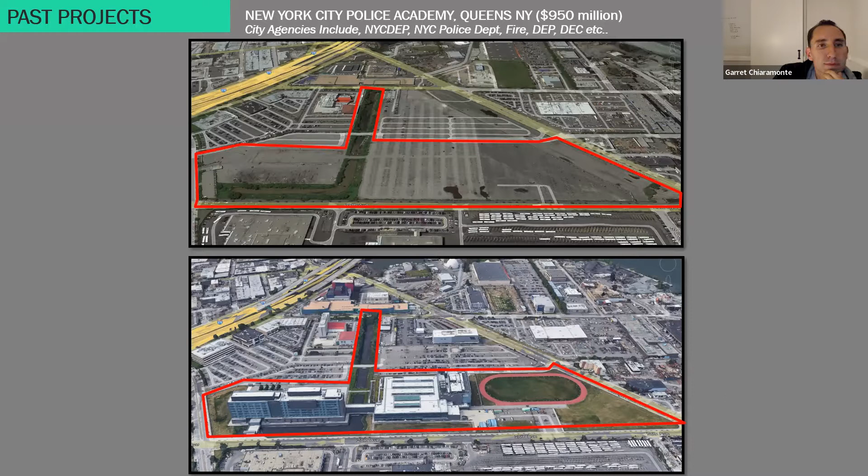All right, great. So I'm going to go through just a couple of very high-level projects because it puts the entitlement process in context related to very large, complicated projects versus some of the local projects.

This project here is the New York City Police Academy in College Point, Queens. People from this area probably know this location. So how do you take a parking lot, basically 35 acres, and build a world-renowned headquarters for the New York City Police Department?

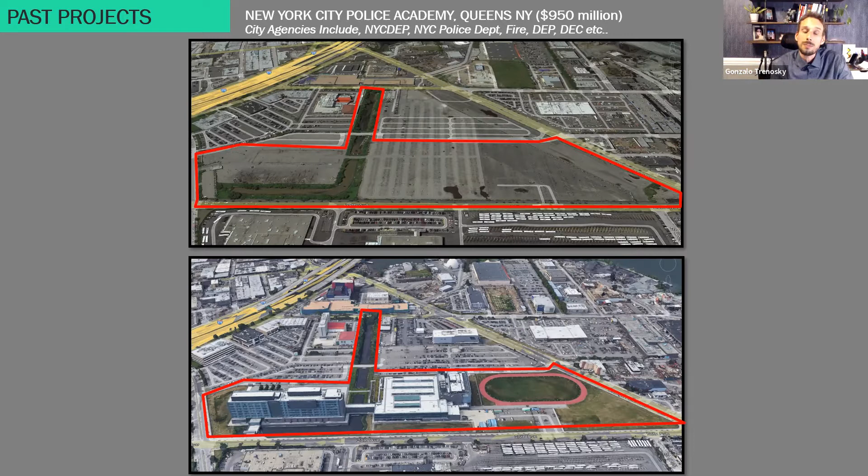Well, it's pretty large, a $950 million project, probably more than $1 billion at the end of the day. Basically 720,000 square feet of police academy training facility for the entire five boroughs area was designated for this site. Duration: 9 years from design all the way to final construction. So very long time frame.

And this is what I'm talking about when you're doing these types of public projects. They take much, much longer to take a piece of, basically what you'd think is an empty parking lot, and build what you have there. Really it's because of the reasons I list there.

Many stakeholders are involved. Public comment periods are very lengthy. You have to put in environmental impact statements through the DEP on the federal side, which takes upward of 18 months to 2 years to get through. You have federal and city dollars that go into these types of projects, further increasing the red tape.

You have very large design teams. My role was a very small role as the civil designer for this. You had architects, MEPs, just a huge team of engineers that were needed to really design this type of project, entitle it, and get it to final construction.

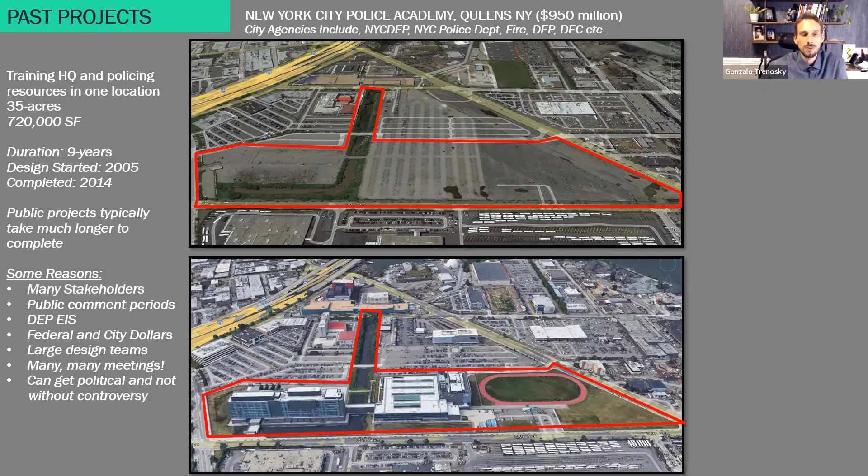Many, many meetings, as you can imagine. And really, these types of projects are very political and not without controversy. The Army Corps of Engineers also had a role in this project.

Now, I gave you kind of a definition of navigable water. So anytime you have a site which has some sort of creek, stream, or river, you want to make sure you figure out if it's an Army Corps of Engineers labeled navigable water, and that's kind of the definition.

Anything that is subject to the ebb and flow of tide, or has been used in the past as a transport route for interstate or foreign commerce, could fall under the navigable water designation. That's a very lengthy process through the federal side, the Army Corps of Engineers, if you want to touch any of that. In our situation, we had a little stream going through the site, which was an ACOE designated waterway, and that increased the duration of the design and entitlement process for this type of project.

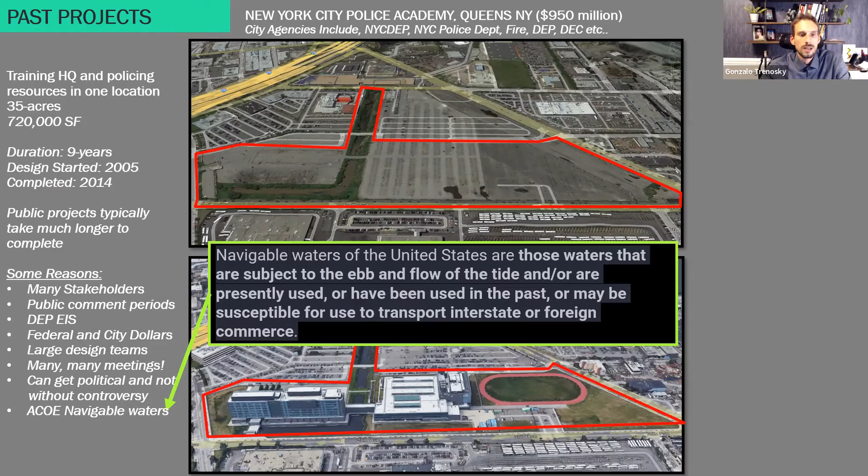This next one just shows what the final product looks like. It's a pretty amazing facility. That's a rendering above, and that's what was there before. It won a lot of awards and was designed by world-class architect companies. They have mock subway train stations inside the facility, mock parks, and buildings—anything needed to put police through certain trainings is located in these buildings. It was a pretty amazing project when it was finished.

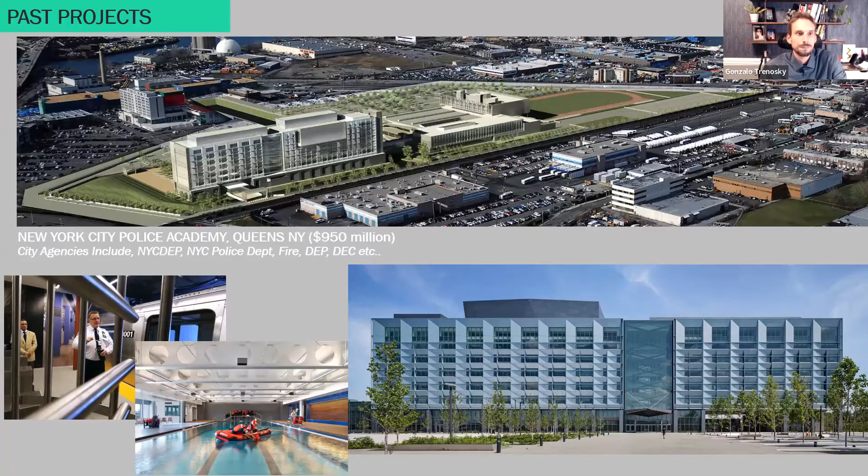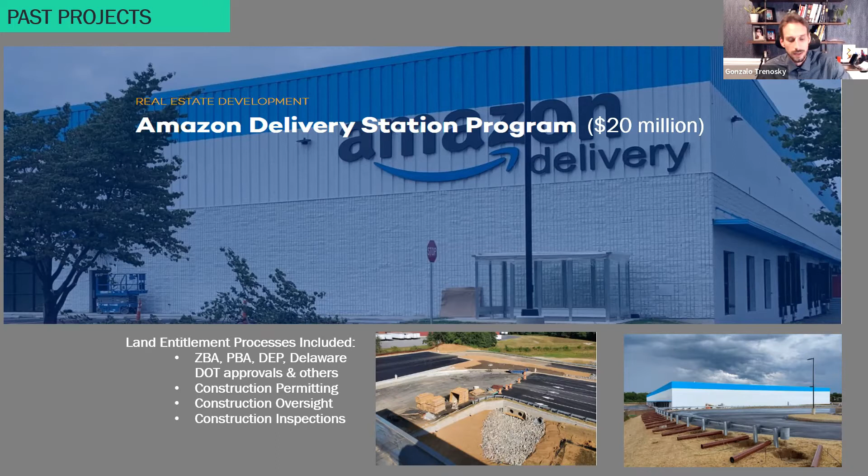The next one is more typical: Amazon delivery stations, the last-mile delivery stations you see pop up everywhere. These are pretty straightforward. We did a few of these, and it goes through the local process of zoning board of adjustments, planning boards, and DEP. This was a Delaware project, so it involved the Delaware DOT. We brought it through construction permitting, oversight, and final construction inspection. These were more of the bread and butter projects because it was a straightforward process. Most of the time these projects aren't very contentious because they bring jobs to areas that need it, so the municipality is usually very open to approving them—though not every time.

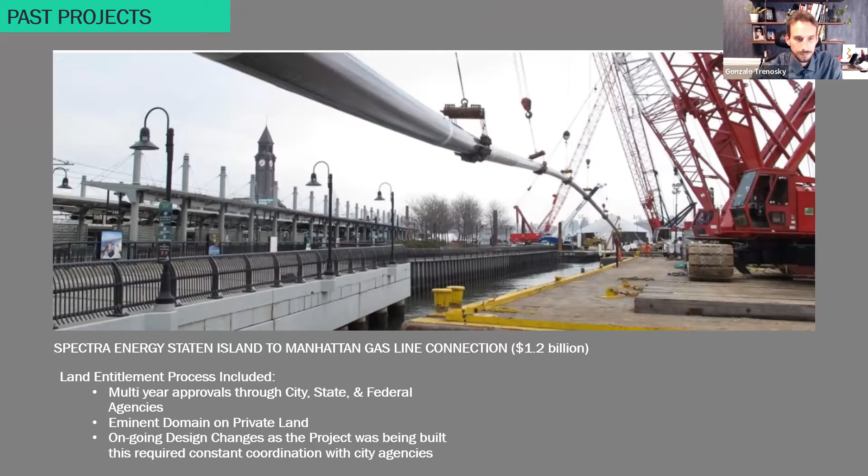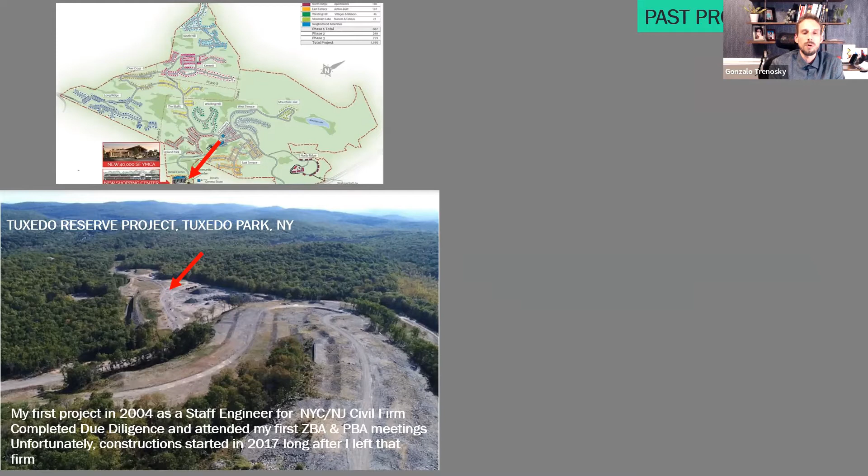Unfortunately, I left this company long before any construction started. So it was just one of those projects that I put in sweat, blood, and tears, working really late nights, submitting drawings, but yet I did not see anything come out of it. It was basically vacant land.

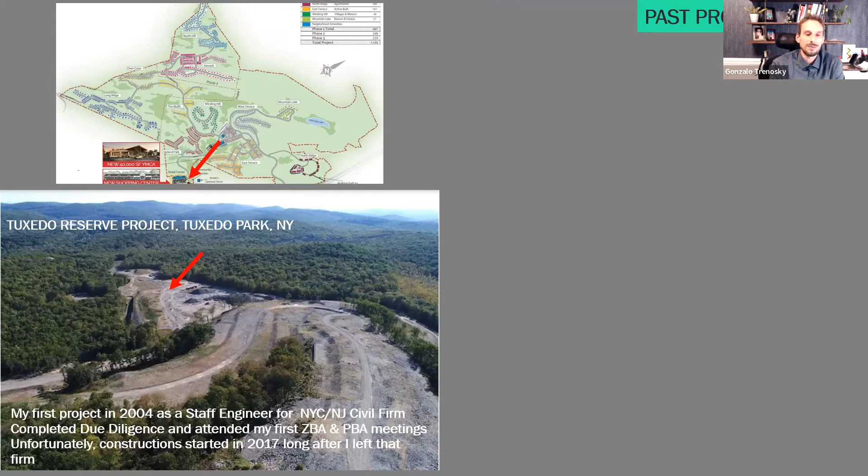I'll give you some background on this project. It's a pretty interesting project. This 2,374 acres of land is owned by Stephen Ross. I'm not sure, some of you might know him. He is the chairman of the Related Companies.

His vision for this project, Tuxedo Park, began in 1989, when he started Related Companies with like a $10,000 loan from his mother. The first approval for this project was in 2004. Imagine, 1989 the design started, with first approvals in 2004.

Site work, as you see there, began around 2017-18. And to this day, I actually went to the public hearing on the website. They're still having public hearings for this project to get approval. So what's taken so long, right? Why is it that a project started in the 90s is still to this day not built?

Well, it was a very contentious project. This project abuts the wealthy town of Tuxedo Park, and the citizens there are adamantly opposed to this project. It requires zoning boards, planning boards, historical boards, environmental boards. It's not an as-of-right project, meaning the current zoning and use for this has to be changed over for what Stephen wants to build here.

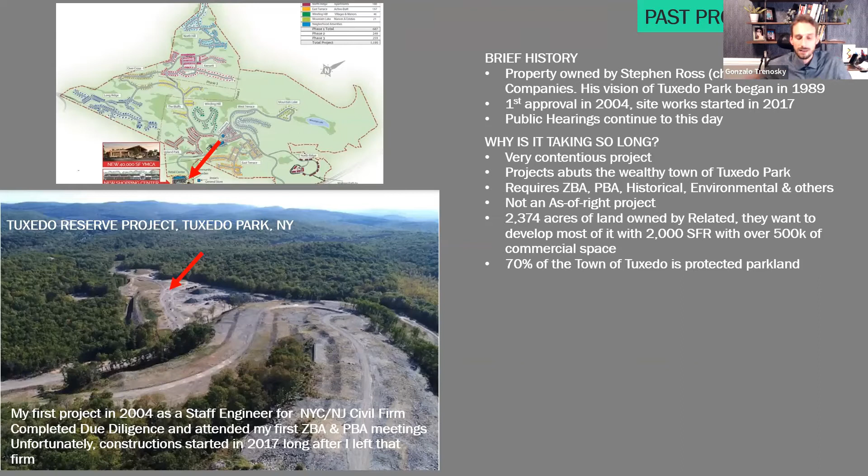So for the 2,400 acres, he wants to put in 2,000 single family homes and over 500,000 square feet of commercial space. The grades are very steep on this property, and you can actually see Manhattan from a lot of points. So these properties are going to go for a pretty handsome amount. 70% of Tuxedo is protected parkland, adding additional red tape that this project has to go through.

So how is that sustainable? How is a project like this sustainable? Well, any other developer obviously would have abandoned this project a long, long time ago, right? But you have deep pockets. You have Stephen Ross, the owner of Related.

He built Hudson Yards. They're the largest landlord in New York City. They manage over $4 billion in equity capital. And Mr. Ross is 78 years old right now, and he said that he wants this project completed. We'd like to see it get done. So it's kind of like a pet project of his. He wants this project finished.

And the reason why it's still going to this day is, there's only one reason: the money is there and he just wants to get it done. So what is it going to take to finish this project?

Well, Related Companies is planning on building a $12 million YMCA recreational center that they're going to be donating to Tuxedo Park. They've invested millions of dollars in improvements to Route 17, the roadway at the bottom. They've installed a brand new wastewater treatment plant. They made improvements to the Tuxedo Park Amtrak train station, as well as $2 million in small business grants and more. So these are the concessions that the town is slowly requesting and requiring as they go through this approval process. These are just some of the things it's going to take for this project to come to fruition.

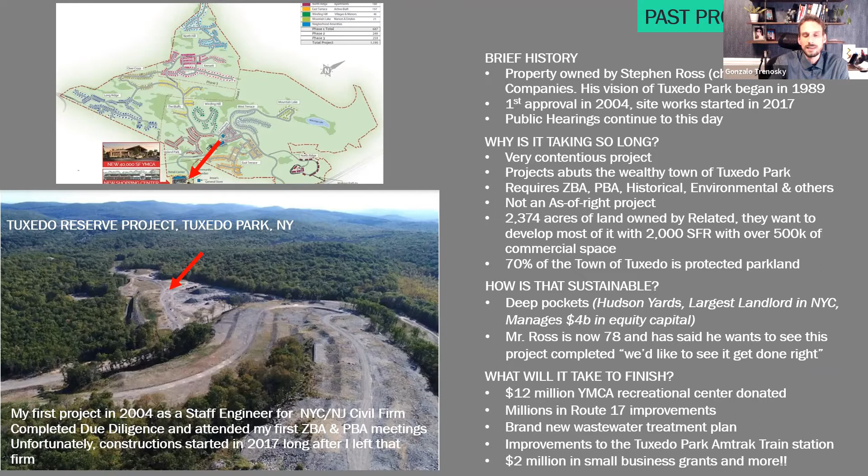These projects are basically from different categories. You have large New York City projects, federal projects, and then more local projects, with different levels of entitlements that are needed.

So what is land entitlement? Land entitlement is a legal process that involves obtaining approvals to develop a property for a specific use. Think of a piece of land that's not currently zoned properly for your specific use—whether you want to put in something commercial, build single family, multifamily, or industrial. You have to make sure your piece of property is zoned properly for it.

These are a couple of the boards you need to get through in order to get approval. You have the Zoning Board of Adjustments, the authority that grants variances. If your project is not as-of-right, you need to pursue variances, and they approve any kind of rezoning that your parcel of land requires. After you're done going through the ZBA, you then go through the Planning Board of Approvals, the PBA. Once rezoning is finished, you then put together what's called a preliminary final site plan set, which is developed.

This process basically involves the majority of your professional team, your design team, that's going to be designing the project and putting together a drawing set.

That shows your vision, shows your proposed improvements that you're looking to do. Other boards can come up. This is the town of Dobbs Ferry, New York, right in Westchester County. We had a project there. These are just some of the boards on top of the ZBA and the PBA that we had to go through. This is a little bit extreme because it's a very bureaucratic city.

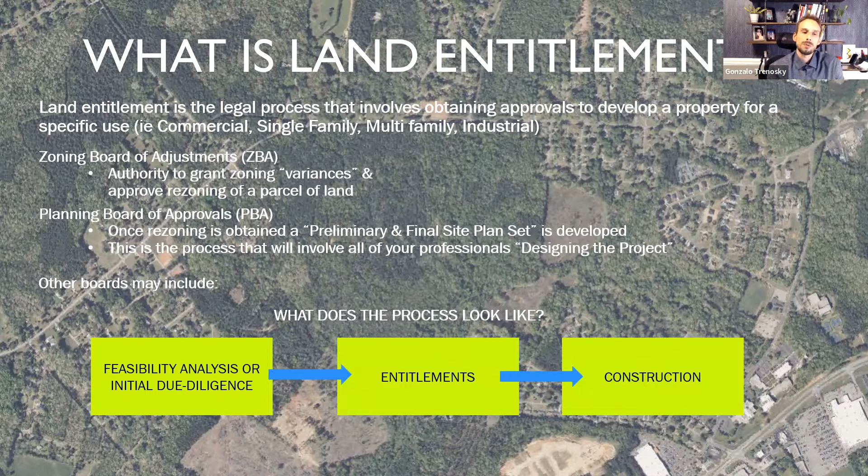So you want to get your feelers out there before you put the property on a contract and go through the entitlement process. After that process is where you have all your approvals necessary to start construction of your project. So I broke this up into phases.

In phase one, very similar to multifamily, you have to put your team together, because by yourself you're not going to get through this process without the help of architects and engineers. As I show there, these are just the majority list of engineers you will require, based on my experience in the Northeast, where you really require a lot of professionals to get you through the process.

What I'm realizing here in South Carolina and North Carolina is the process is much simpler. There's not a need to have all of these professionals on your team, just due to the less red tape, less bureaucracy in this area. That really helps with expediting your land entitlement process.

I definitely recommend at least 2 proposals from each discipline in order to develop your high-level soft costs. Soft costs are basically your engineers, your land attorney costs, anything that gets you through the land entitlement process. You want to select your team based on experience. Cost is an aspect, but I wouldn't say it's the most important, and definitely consider the timeline.

Whoever you select as the lead for the entitlement process should be somebody that has gone through the process in that town you're looking to build in. Because they're going to be familiar with the board members and all the nuances that city or municipality has, and they'll really help you through the process versus using an outside engineer or architect that's not familiar with it. It's good to use local help in that aspect.

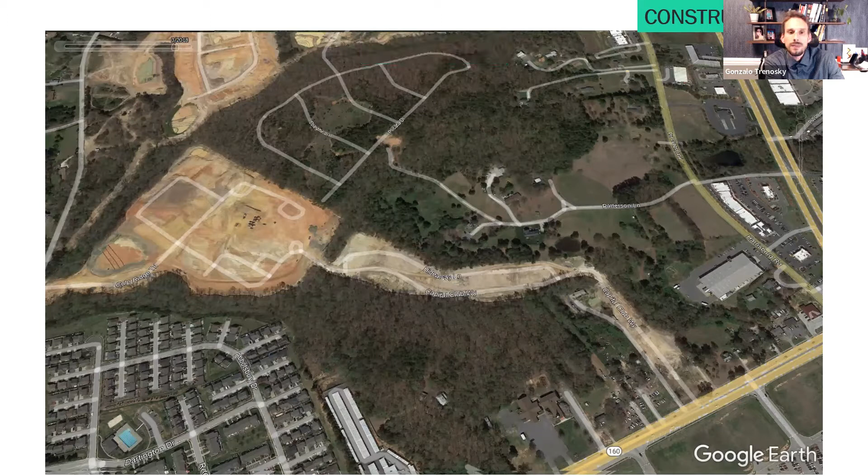So within the prior years, the next step really is your construction phase. Within 1 year from the previous slide, they were able to install roadways. It looks like they did some foundation pads for each building, and they built up a bunch of buildings there. I believe this one's around 365 acres.

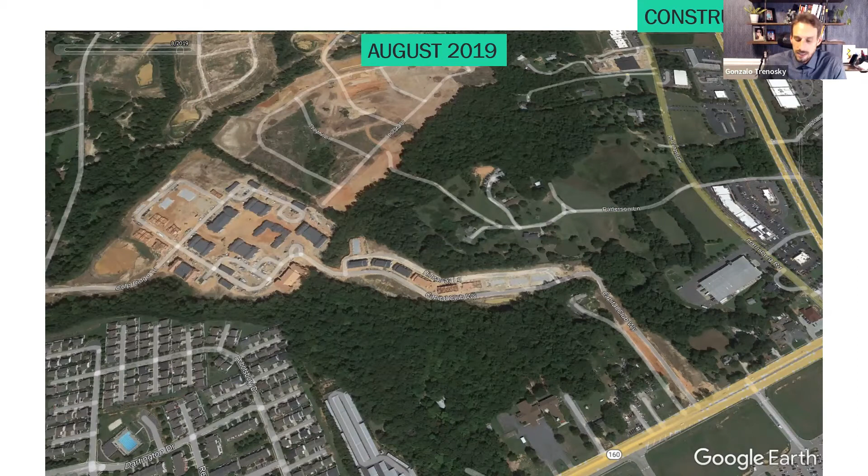I know because my parents actually live in this location. It's a very nice complex, a very large complex, and this is kind of the finished product, April 2022, when it was finished.

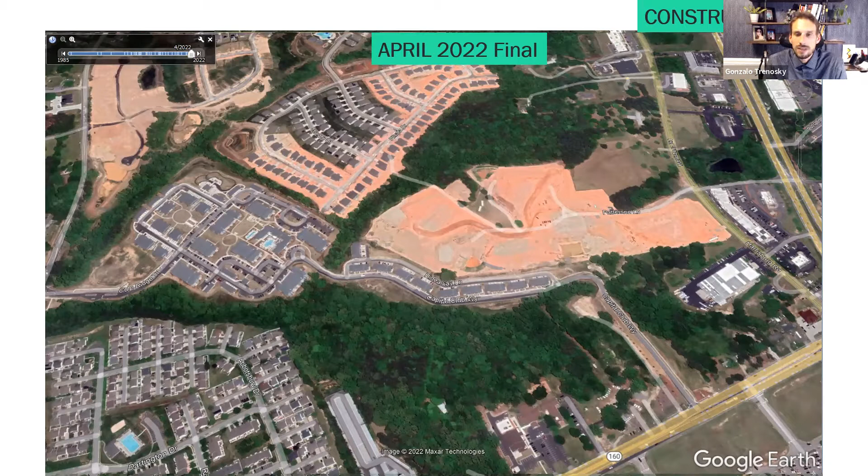You can see to the north and the east there's even more projects in the process of being entitled and developed. To the north you've got all single family, and a lot of stuff down here is single family subdivisions. I think the bottom right is another multifamily project they're building.

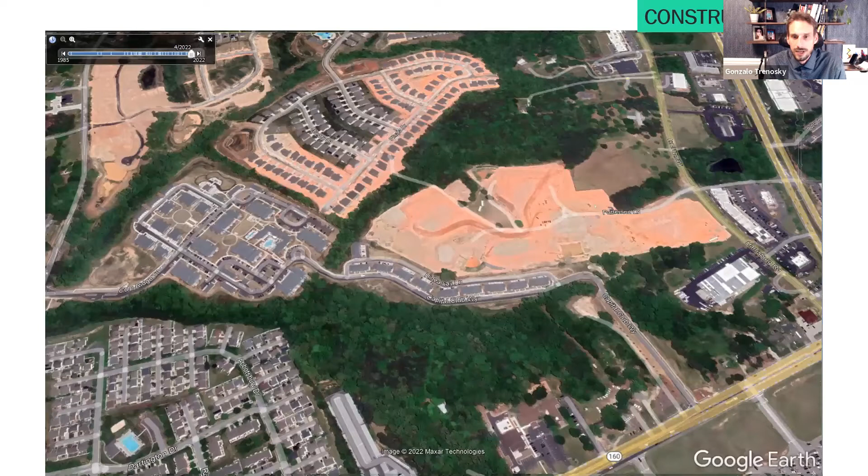That's an example of a successful project, something that's done a lot down here, and hopefully something that will be successful in the next year or two.

There was some kind of fraud occurring there, but basically this is an example of a project that really has no use here. Surrounding this area, it's all single family, at most 2 stories, maybe 3 stories, and then they go in and try to get a 21-story high-rise built in the middle of this area.

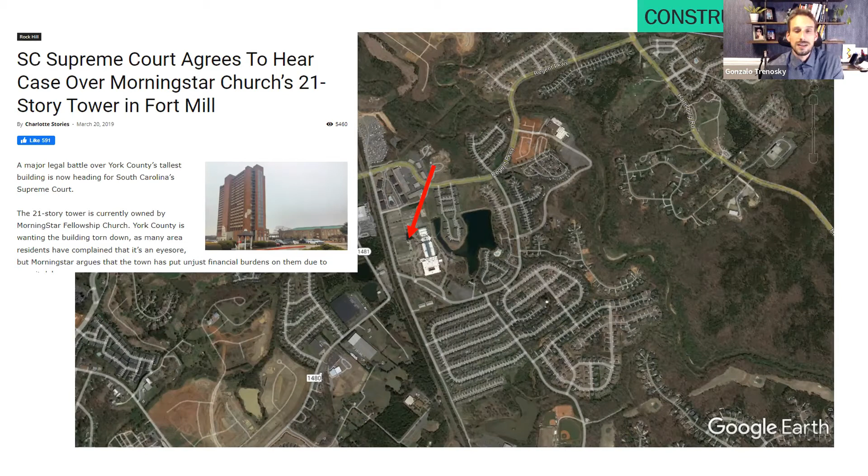We're about 30 minutes from Charlotte, where maybe the closest high-rise is over that height. But I guess it just shows you what money can buy in this area, because I guarantee there was definitely a height restriction for this project. And as you can see in that view, it's just a very awkward building.

I mean, it's kind of like a sore thumb in the area, having this 21-story building there. It's been sitting vacant for 30 years. Basically, he started construction 30 years ago. There was some fraud related to overselling of timeshares. I think he might have done a little jail time, and basically it's been sitting there, and they've been going back and forth with York County, putting in proposals and saying that they have a new idea. They want to convert it this year. They want to convert it over to a retirement center for seniors, and it's still sitting vacant there.

But I got to tell you, with the condition that building is in and how long it's been sitting vacant for, it's going to require just so much money that you have to dump into this building just to get it safe again before you even start completing the amenities and finishing the building. So the county wants to tear it down. Jim Bakker wants to keep it and finish it. So it's a continual battle between Morningstar Church and York County. We'll see where this thing goes. That's basically it. Hopefully you guys enjoyed that.